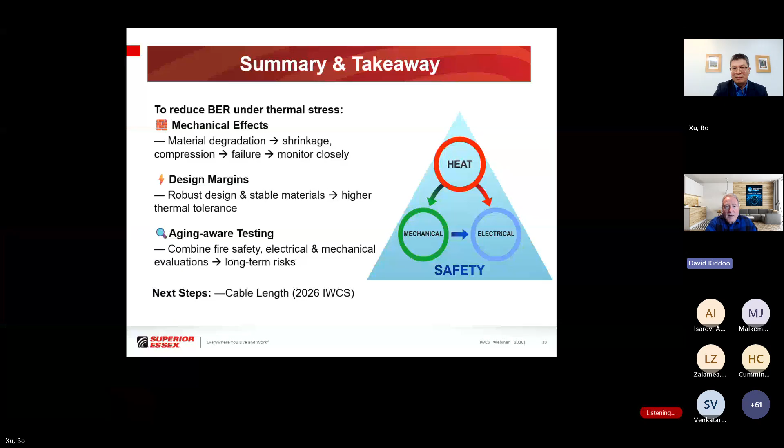So today, we're honored and welcome Bo Xu. He is the R&D Materials Manager for Superior Essex Communications and resides in Georgia, USA. Bo will be presenting his paper today on the effects of temperature rise on data transmission performance in power over Ethernet PoE cables. Bo is a materials engineer at Superior Essex Communications. He earned his doctorate degree in polymer engineering from the Georgia Institute of Technology in 2010, and his master's in materials science at Zhejiang University back in 2004. Bo has an extensive background in polymers, with over 30 scientific and conference papers published, and he also holds over 10 patents. Prior to Superior Essex, in 2017, he worked as a packaging analytical scientist at the Coca-Cola Company. So we welcome Bo. Thanks for being with us and presenting this excellent paper that you delivered at the 2025 IWCS. Take it away.

All right. The screen's on. Everybody can see it, David? Yep. Looks good. Good. Thank you, David, for the kind intro, and thank you everyone for joining today.

Really excited about this opportunity to share our 2025 IWCS work. And as David mentioned, I'm Bo Xu, a materials engineer at Superior Essex. And thanks to my colleague, Dr. Germer, as a co-author; his contributions were essential to this study. Today, I will talk about thermal aging and the bit error rate performance in power over Ethernet cables.

We will examine how high temperature and long-term aging affect signal integrity and reliability. This matters because PoE cables carry both power and high-speed data simultaneously, making them more vulnerable to heat. More power means more heat, and more heat sparks more problems.

Our goal here is to better understand electrical change and heat and how they translate to bit error rate performance over time. By the end, you will know what changes from heat, why, and how to design better, tougher PoE cables. So with that, let's get started.

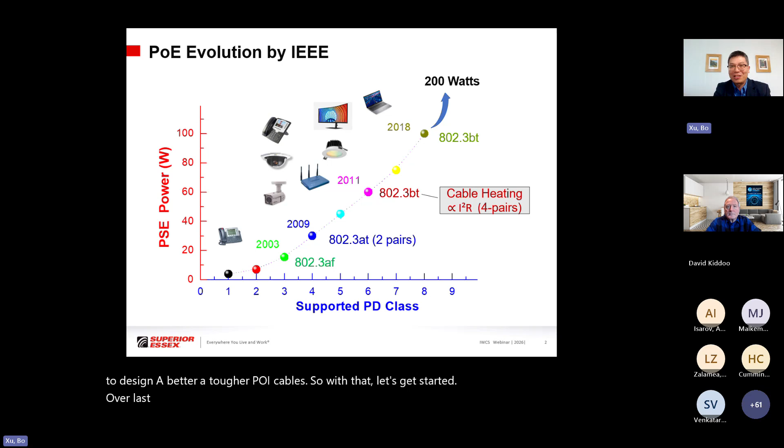Over the last 20 years, PoE technology has come a long way, from a simple 15-watt 2-pair to today's 100-watt 4-pair, powered by PSE, or the power source equipment. The PDs, or powered devices, started mainly with IP phones back in the day, pretty basic, and then expanded to security cameras, sensors, radio phones, LED lighting, digital displays, and even TVs and computers.

Looking ahead, future PoE systems will push toward 200 watts. But here's the problem. Higher power means higher current, and higher current generates more heat in the cable. So now we have two key questions. How much does the heat build up? And what does that heat do to the cable? To address the first question,

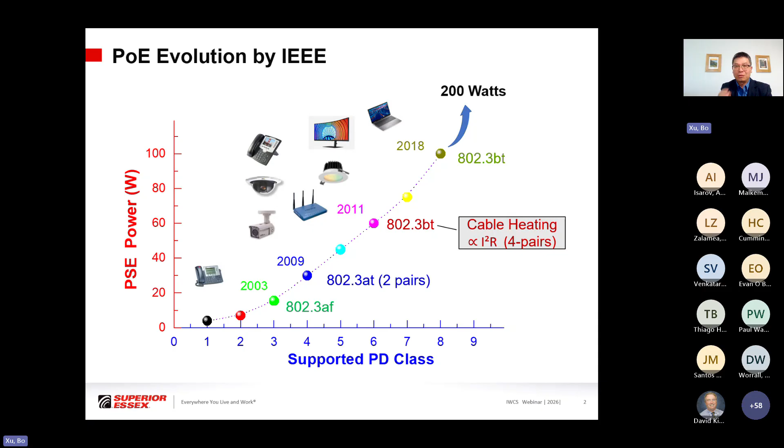the heat generated in the cables during operation can rise significantly, especially when tightly bundled. Our early work from T. Lanoe's study in 2017 showed big bundles can get really hot inside. Some studies have even shown the center of the bundle can reach nearly 200 degrees Celsius under extreme conditions.

At those levels, the cable materials, especially insulation and jackets, begin to thermally age, soften, and even fall apart. The materials degradation shapes the electrical performance, ultimately impacting long-term reliability.

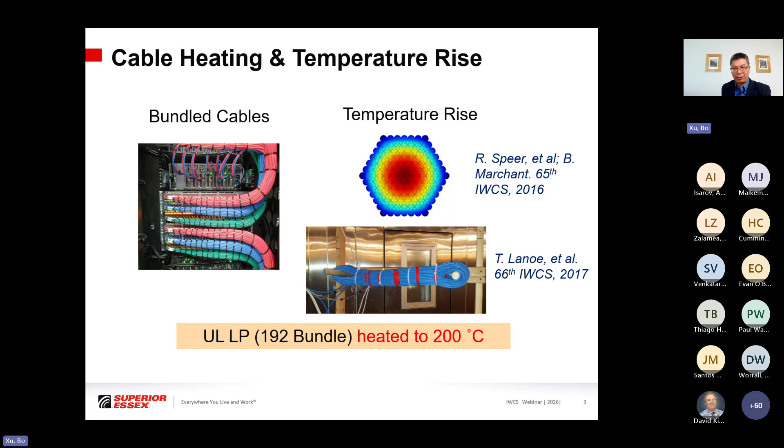So let's look at what temperature actually does to the cable materials. This slide shows two examples. On your left is polyolefin insulation. After just 10 days at 120 degrees Celsius, it became very brittle, and you can see it in the photo clearly, it's falling apart.

On the right is PVC jacket. Same thing, after 10 days at 136 degrees, the PVC showed clear material loss, shrinkage, hardening, and even failed the T&E tests. In contrast, the fluoropolymers really stand out here.

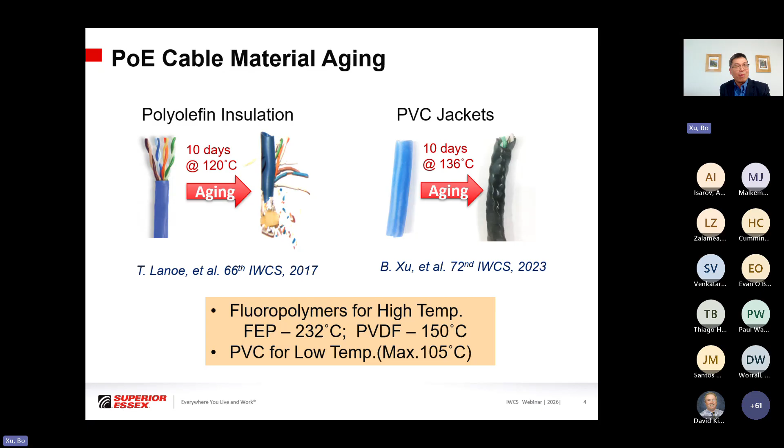FEP stands up to 232 degrees Celsius and PVDF up to 150, while still keeping their electrical and mechanical properties solid. Flexible PVC jackets, by comparison, are typically rated only to 105 degrees Celsius and start aging much earlier. So the material choice matters a lot.

Now, let's look at why the cable materials degrade, here using the jacket as an example. When the jacket gets heated, several processes happen simultaneously: external attacks like oxygen and moisture, chemical migration and release, and interaction with other cable layers. For example, plasticizers can migrate out of flex PVC, making the jacket stiffer and more brittle.

The polymer itself can release some volatiles, including small amounts of hydrogen chloride, which speed up aging. Together, all these effects weaken the cable materials, making them less flexible and reducing long-term reliability. And in high-power PoE, this is all going to happen even faster.

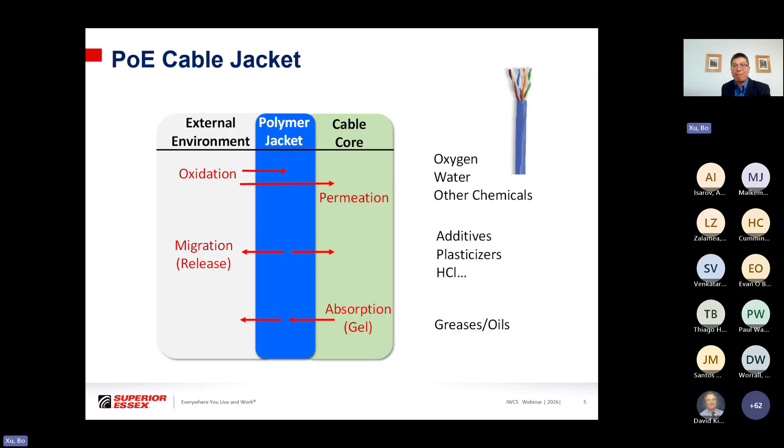So far, we've seen how heat changes the cable materials, like weight loss, polymer degradation, and mechanical change in the jacket. But that raises another important question. If the material chemistry changes, does the fire behavior change too? The answer is yes. But how?

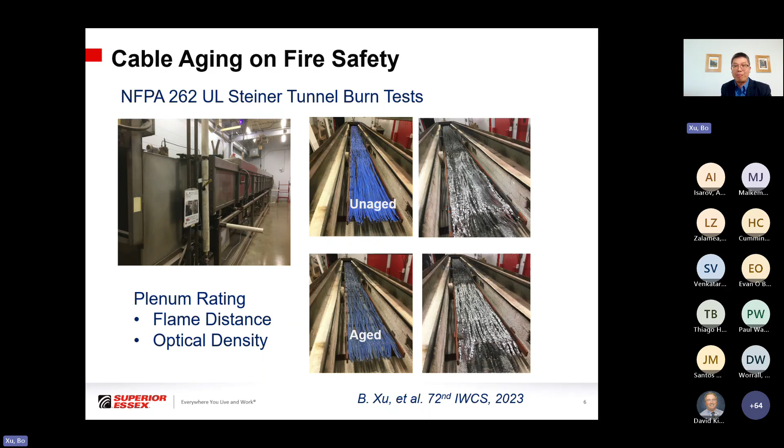To find out, in 2023, we ran burn tests in the UL Steiner tunnel, comparing thermally aged cables versus unaged ones to see how aging affects the flame spread and smoke generation in plenum-rated PoE cables. So what did we find? Both aged and unaged cables actually passed the plenum burn. In some cases, the aged cable even showed a shorter flame spread and less smoke.

The full details are in our 2023 IWCS paper if you want to dig deeper. But the key point is this: thermal aging changes the fire behavior, so it really needs to be evaluated through testing.

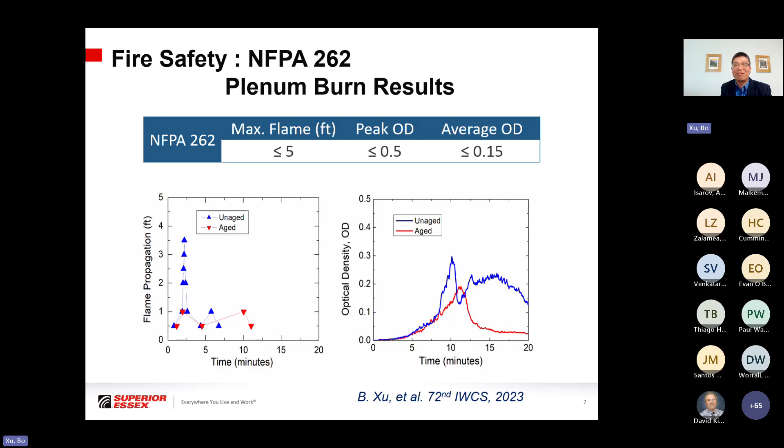Now, let's move on. How do we know the cable materials have degraded too far? To answer that, we use critical weight loss, CWL, based upon the UL 444 mechanical criteria. Post-aging, the PVC jacket must hold elongation above 50% and tensile strength above 85%, or it's a failure.

In our 2022 study, we found that the critical weight loss varies from 2 to 5% across those 5 PVC jackets. And different PVCs fail differently. Some are sensitive to weight loss, but others are not.

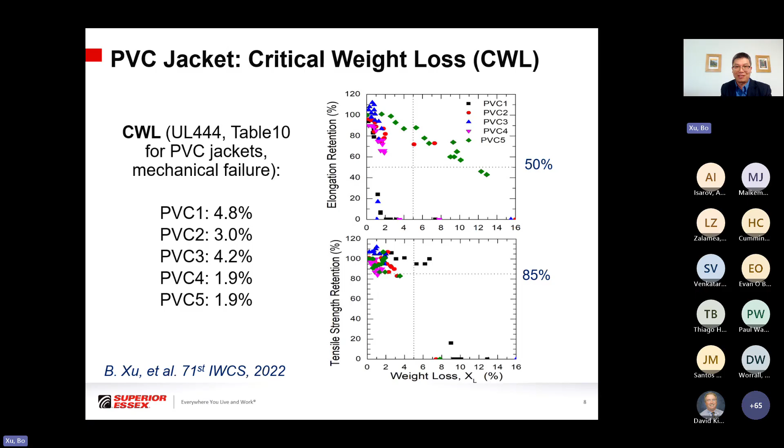Using this critical weight loss and thermogravimetric analysis, or TGA, we predict lifetimes. Based on our model, only 1 in 5 PVC jackets can last over 20 years at 60 degrees Celsius. But at 75 degrees Celsius, none make 20 years. When the temperature hits 100 degrees Celsius or above, the lifetime crashes from years to just days.

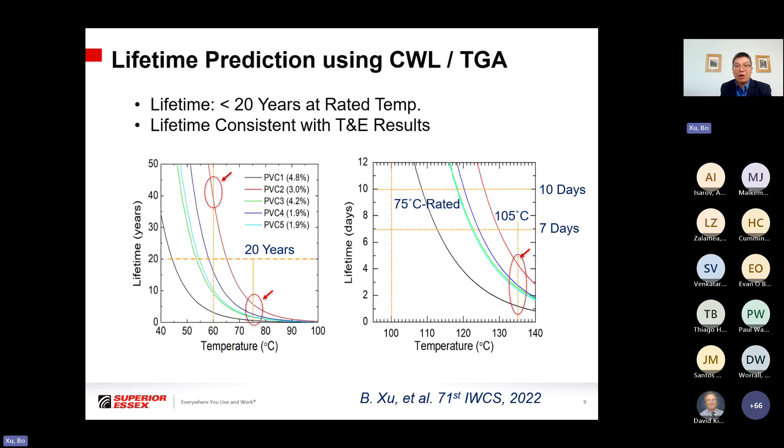For example, all these PVC jackets survive 10 plus days at 100 degrees Celsius, confirming they can be rated for 75 degrees Celsius. However, none of them survived 7 days at 136 degrees, so not qualified for 105 degree rating. And these results on the high temperature side aligned well with our aging test, supporting our predictions on the low temperature side. Overall, these results show you the thermal limits of PVC jackets.

After looking at the materials degradation, let's see how this impacts the electrical performance. In our 2022 study, we examined cables aged at 100 degrees Celsius. On the left, you can see the NEXT curve, near-end crosstalk, gradually shifting downward with aging. That means more crosstalk and less margin. On the right, we track the NEXT margin.

Big drop in the first 30 days, and then leveled off. After about 46 days, the cable finally failed the NEXT limit. So even at a moderate temperature, like 100 degrees Celsius, the electrical performance degrades. It just takes time.

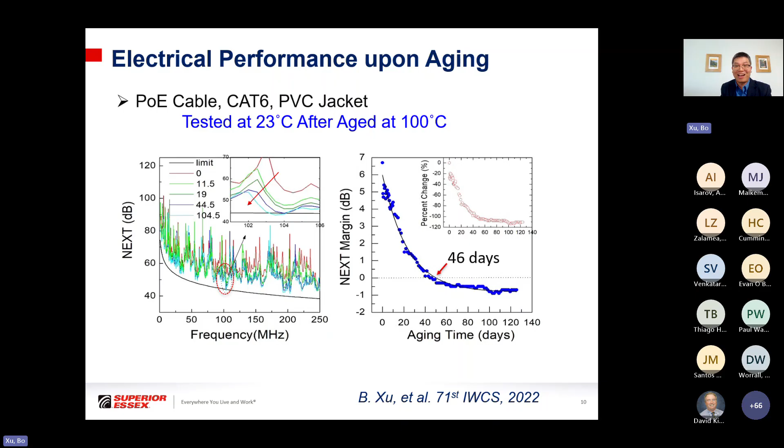In our 2023 study, we pushed even harder. The cables were aged at 136 degrees Celsius, but tested at room temperature. What we found is that the weight loss strongly correlates with crosstalk changes. As the PVC loses material, it shrinks, compressing the cable core, squeezing pairs together, and then crosstalk goes up.

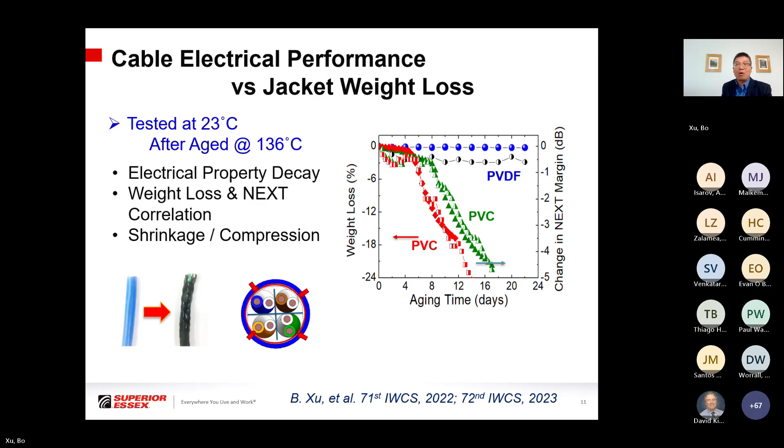Meanwhile, the PVDF jacketed cable had almost no weight loss. The performance stayed steady. And simply put, the unstable jacket caused electrical failure, while the stable materials preserve performance.

Okay, so when we push cables to their limits, like high temperature, high frequency, they act out. And honestly, who can blame them? Even engineers can get a little bit crispy in those harsh conditions, like hot and noisy, who likes it?

Here are our setup and test method. We tested 100-meter cables in an environmental chamber using both thermocycling and isothermal aging at elevated temperatures, and then cooled them to room temperature. After each stage, we measured the electrical parameters and bit error rate using Spirent N4U BER tester and Fluke DSX 5000. Why cool down? It simulates real-world applications, since PoE cables heat up during operation but cool when power's off.

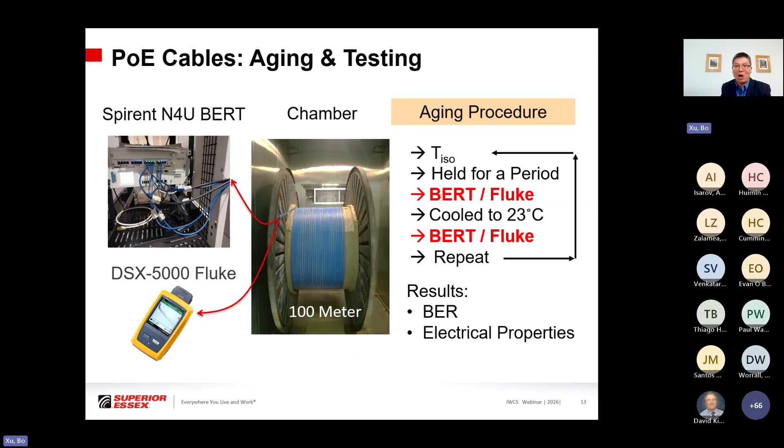The BER testing is statistically demanding. To achieve 99% confidence for a target BER of 10 to the minus 12, we need to transmit over 4 trillion bits. Yes, 4 trillion. At 1 gigabit per second, that takes roughly 77 minutes. At 10 gigabit per second, it's about 8 minutes. Our tester flags any frame with even a single bit error, and each frame packs 1024 bits. So we get very fine resolution, catching even small changes as cables age. Tougher, but real.

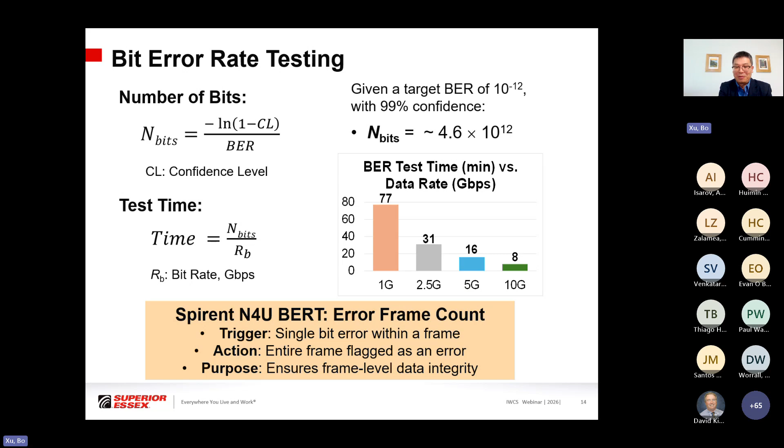So what did we test? 6 cables total, all 4-pair PoE cables using 22 gauge copper, covering Cat6A, Cat6, and Cat5E constructions. The key differences are in jackets and constructions. Cable 1 and cable 2, both Cat6A, have an FEP cross filler and aluminum tape shielding over the pairs, and thicker FEP insulation. Cable 1 uses a PVDF jacket, a high temperature material, while cables 2 through 6 use PVC jackets.

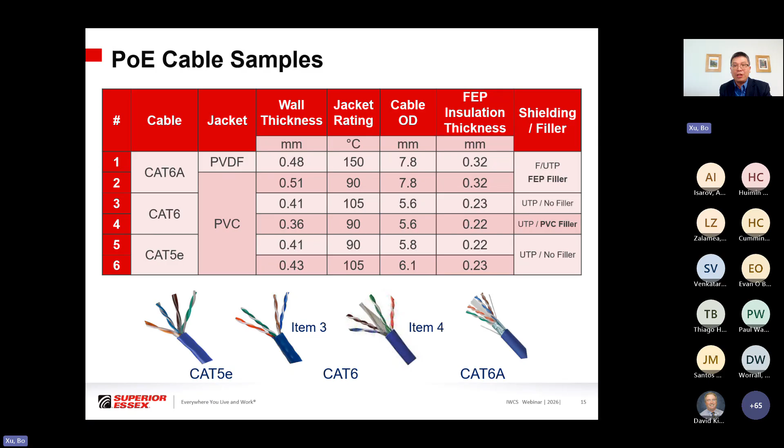Cable 4 is interesting, using a PVC cross filler instead of FEP. And overall, this mix gave us a clear view of how insulation, shielding, and special jacket materials influence PoE performance under heat.

All right, here are the BER results at different temperatures. Let me walk you through this table. At room temperature, all cables show 0 errors. Everything works fine. At 90 degrees Celsius, still zeros for most of the cables. But the Cat6 item 4 starts showing link problems, marked as unstable or not connected.

At the higher temperatures, the same pattern holds. The Cat6A cables, both 1 and 2, perform the best. 0 errors all the way up to 10 gigabit per second, even at 136 degrees Celsius. The Cat6 item 3 and both Cat5E cables also hold 0 errors up to 5 gigabit per second. But the Cat6 item 4 cannot maintain connection at high temperatures, total link failure.

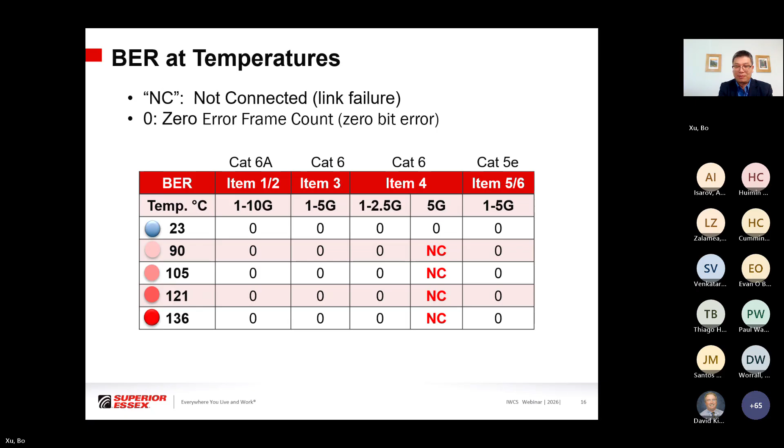Now, let's understand why the heat changed the performance. These slides show the insertion loss curves at 3 temperatures, from room temp to 136 degrees Celsius. As temperature goes up, the copper resistivity jumps roughly 44% in this range. That's pure physics. We expect that.

But look at the different rates of increase. The Cat6A item 2 stays below the limits at all temperatures. Why? Thanks to the thicker FEP insulation and FEP cross filler. Good design pays off here.

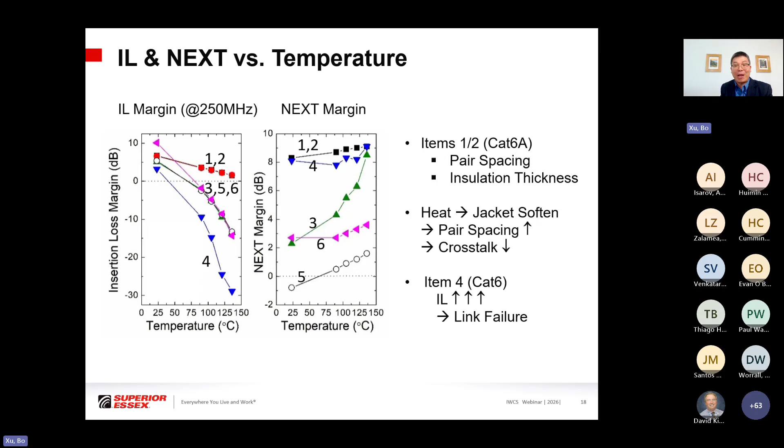Meanwhile, the item 4 shows a sharp increase in insertion loss or a sharp decrease in margins, eventually failing entirely, likely due to the poor thermal design. So the material stability, insulation thickness, pair spacing are critical for thermal performance.

Now, the situation gets tougher with 136 degrees Celsius. Well, the aging is much more aggressive. Let me explain this table. We test the cables at temperature and after cooling to room temperature. Both items 3 and 5 start showing the errors after a few days. By day 7, the item 3 has 17 errors at 5G speed. The item 5 has 16.

That's clear evidence for signal degradation from prolonged heating. The item 4 never connects at all, total failure. But here's a critical finding. After aging, we cool them back to room temperature and test again. Results, 0 errors across all cables. What does this mean? The BER failures are thermally driven, not from permanent material damage, at least not here yet.

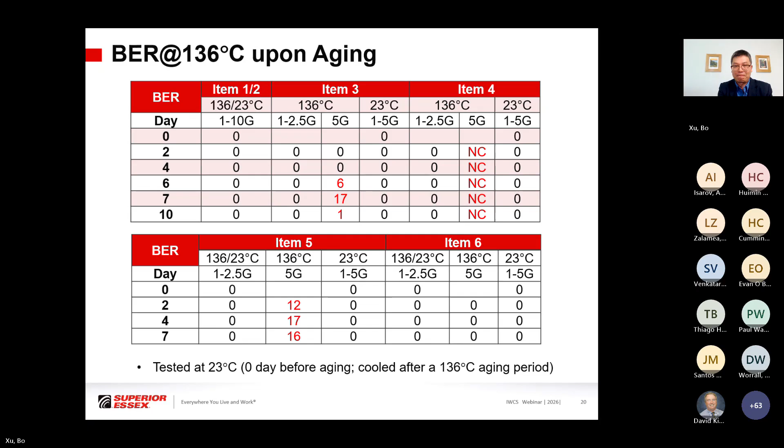Now, let's take a close look at item 3 as an example. This slide shows the near-end crosstalk and near-end ACR curves before, during and after thermal aging. When we zoom in on those worst-case regions, here's what we see. After 4 days, the curves start shifting. The crosstalk actually goes up, but the ACR drops because the insertion loss gets worse.

After 10 days, even bigger shifts. This time, crosstalk gets worse quite a bit, and ACR keeps dropping because of it. Now, cooled back to room temperature, some performance recovers, like ACR increases, because insertion loss goes down and copper resistivity drops with cooling. But the crosstalk stays even higher than before aging.

This tells us some thermal effects are reversible, but others are permanent. The reversible part, the thermal effects on copper resistivity. The permanent part, the cable materials change with deformation, weight loss, and the cable won't go back to its original shape.

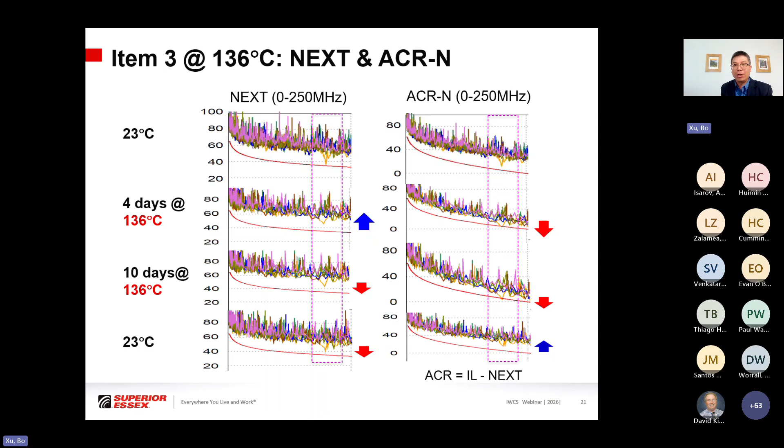Since all cables use FEP insulation, the jacket changes drive what we see, except the PVC cross filler in item 4. Look at the weight loss plot on the left. Some PVC jackets degrade much faster, like item 4. There are big differences in thermal stability. The PVDF jacket on item 1, almost no weight loss, super stable.

On the right, the graphic shows the physical changes upon heating. The jacket softens, expands when heated, hardens with prolonged heating, and then shrinks when cooled. The bottom photos, after aging, some PVC jackets show severe deformation and strong discoloration. But item 1 with PVDF jacket looks almost untouched.

Here's what we learned. The jacket behavior is the key warning sign. The weight loss, hardening, shrinking, all lead to performance degradation. And beyond dielectric effects, these mechanical distortions change the pair geometry inside the cable, hurting the signal integrity. For long-term performance, the material selection is not optional.

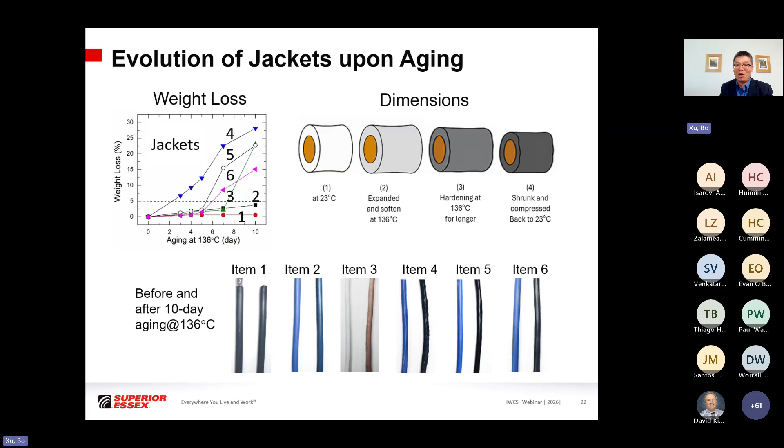Okay, so let me wrap it up. 3 key takeaways today for you.

Takeaway number 1: mechanical changes in the jackets due to their weight loss, shrink, hardening, compressing, serve as strong indicators of upcoming bit error rate issues. So monitor them closely. Takeaway number 2: design margins matter. Robust shielding, good cross filler, stable jacket materials; this boosts both electrical and thermal tolerance.